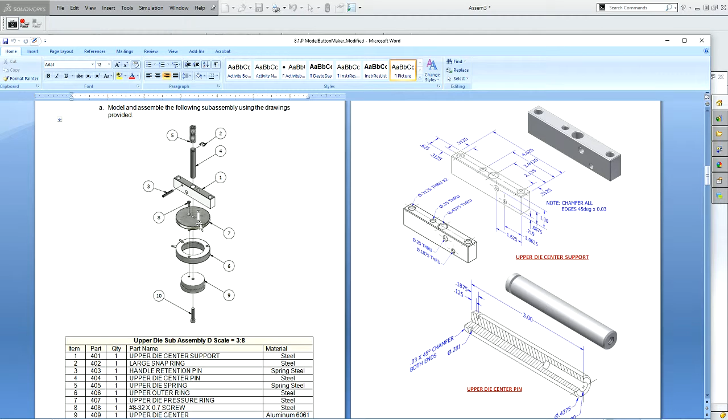In our Word document, we've basically constructed the top portion, the upper die center support. We've put the spring on, the rod that goes down the middle. We have also put on the pressure plate here, the upper die pressure ring, along with the upper die outer ring. The last thing we have to do is to put in item 9 and 10, which is 409 and 410. Upper die center, and then also the socket head screw that holds that in. So let's go ahead and do that.

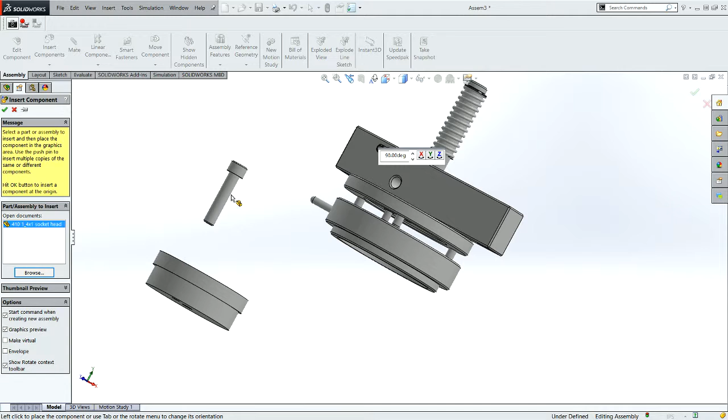So I'm right where I left off. I'm going to go ahead and get out of my mates, and I want to insert a component, and I'm going to insert part number 409 and 410. So there we have those two. You can kind of see that what I have to do is flip this part around, and I will do that to insert that into the die assembly. So let me get a better view on that. So this part is upside down. So let's go ahead and start the mate process.

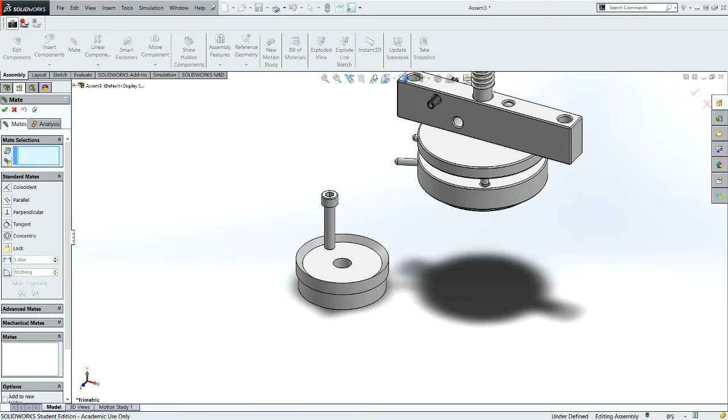So you may think that this part mates firmly to the bottom here. You'd be right to think that. It does approximately mate in there. This hole right here holds that screw. So let's go ahead and connect these two holes concentrically, and I'm going to flip it. That gets my alignment proper.

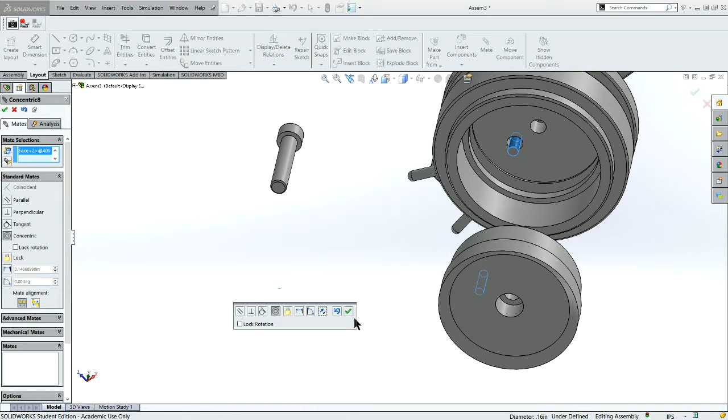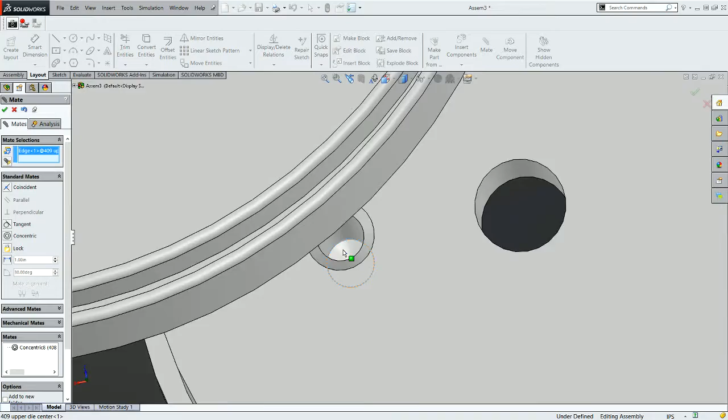Now it doesn't go flush against the top here. There's a little bit of play in that assembly. So let me simulate that play by zooming in here, if I can offset this enough so that I can see down in that hole. That's what I'm trying to do. There we go. And I'm going to pick this bottom ring in that hole. And the head of the bolt right here can't go past that bottom ring. So we'll go ahead and make that coincident. So now you'll see this thing's flopping around up here.

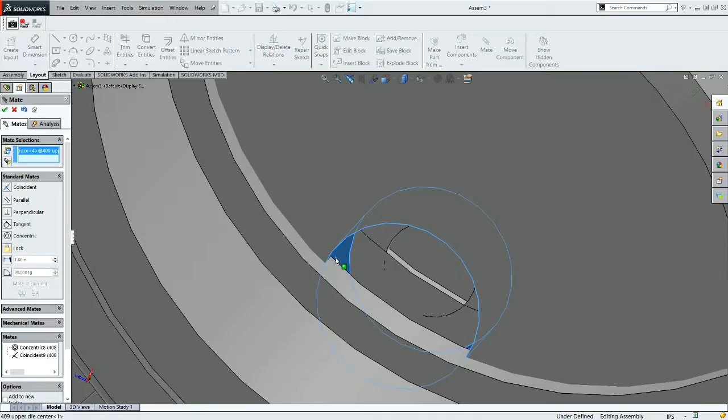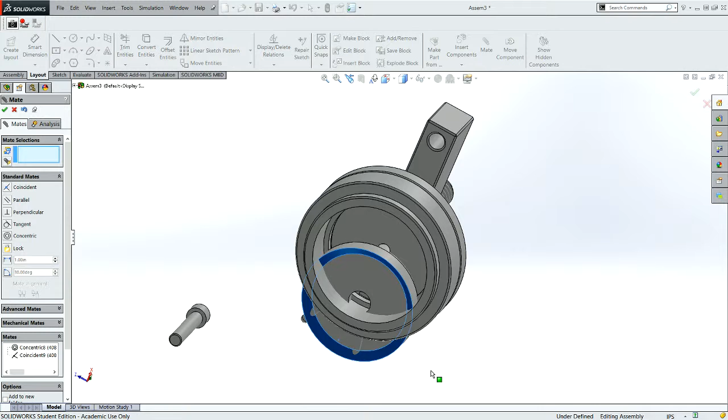The next thing I want to do is I want to make the center shafts concentric. I probably did this a little out of order. Might have been easier to do the shaft first, but I'm going to go ahead and line up these two center shafts here. Yeah, I got that a little out of order, so I'm probably going to end up starting over here. Oh, you know what, it'll be okay. Here's what I'm going to do. I'll use the outside ring, make it concentric with the outside ring. That essentially does the same thing.

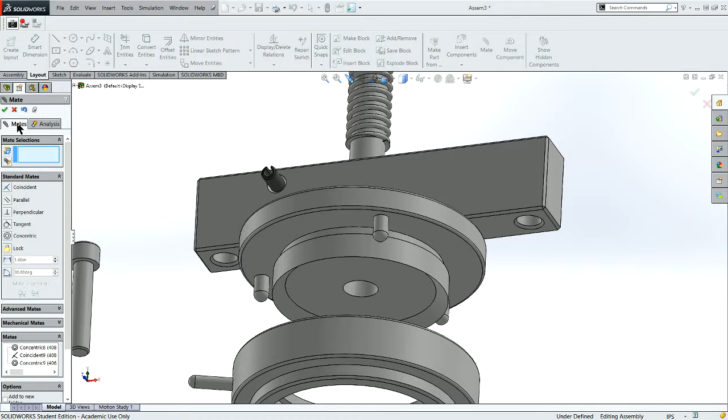So now I have my button maker assembly put together, and you can see that this bottom piece, if you actually look here, it's pretty close to flush in the model. This piece floats ever so slightly. And I actually put that together wrong, so let me undo my mates here. I just backed up. Let me fix this once again.

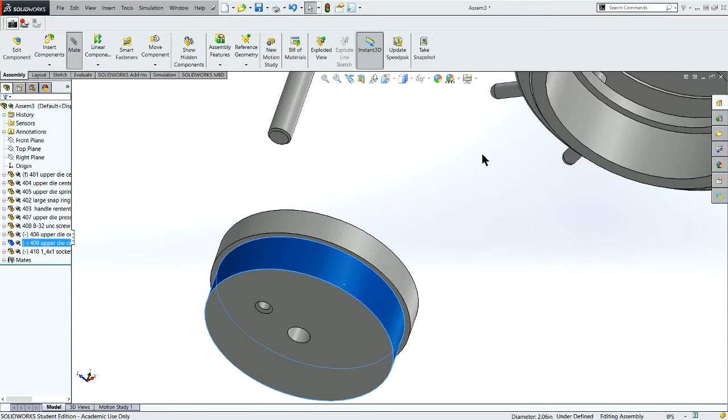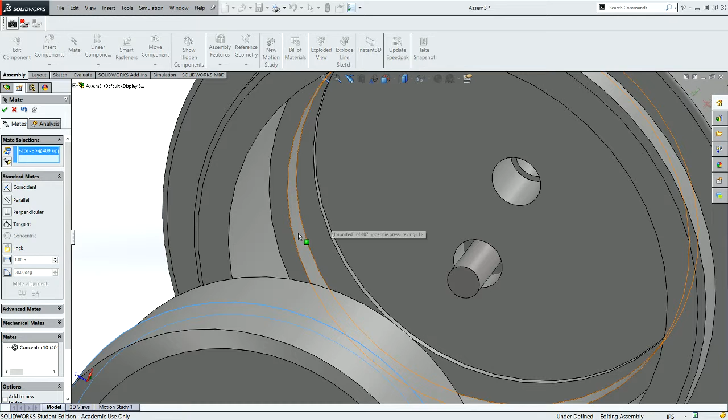So I'm going to go concentric. Mate that about the die. Flip the orientation so the face is up. Now what I'm going to do is go ahead and mate this piece right here. Well, we're just going to put it together. It's not really the way it works. I'm going to mate this edge right there. Now this moves up and down. Really it floats just a little bit in there, but we'll simulate that floating here in just a second. I'm going to lock that in rotation just for simplicity's sake.

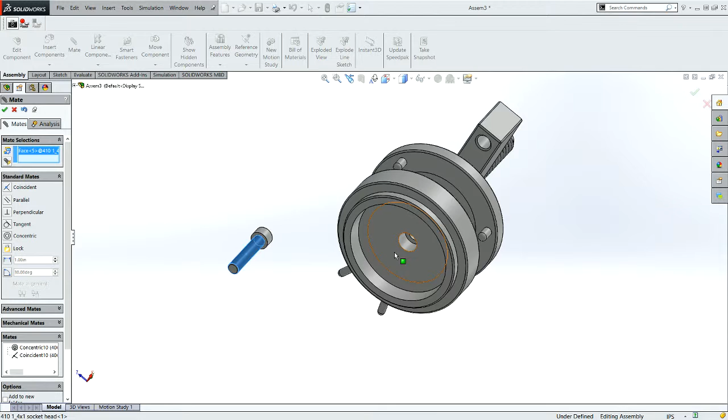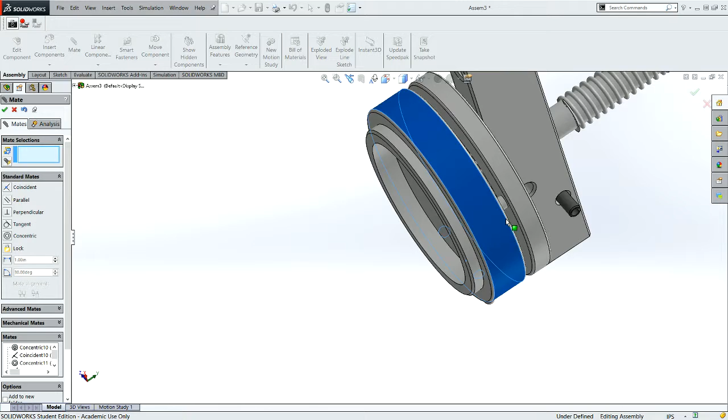And now I'll put the bolt concentrically into the hole, flip the orientation, accept that, and now we'll put the bolt head in. Now to simulate the movement on the part, I'm going to just give it a tiny little bit of flex right here, because that's what it has. So I'm going to do a range mate between these two surfaces. Select my distance, go to advanced, make a minimum of 0, and I'll make a maximum of about 0.1.

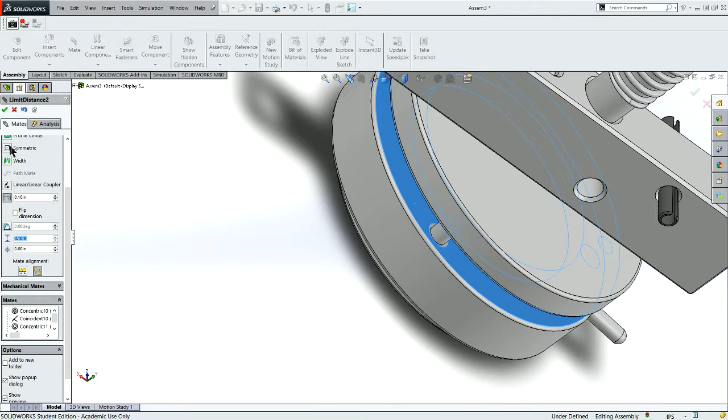And accept that mate. So now what you see is this thing flexes up and down just a little bit and then moves like that. And that's really what it does. What it's doing though is this inside die floats around a little bit more, but that's a little too complex for you to model. So there you have it. That is Subassembly D. That should be done. Let's go ahead and save that.